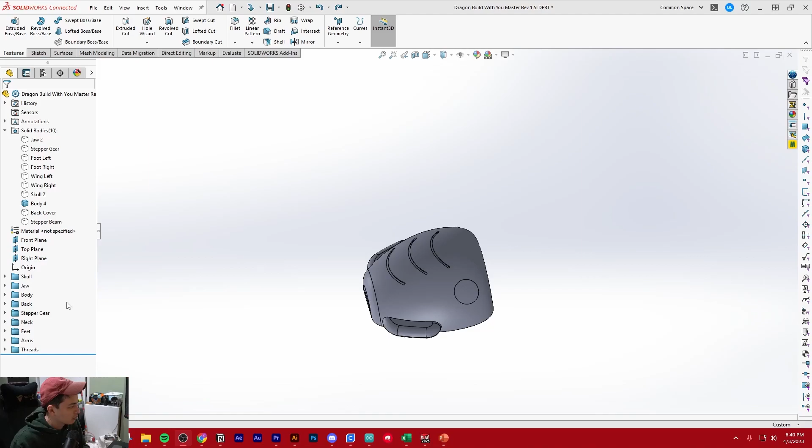Okay. So one thing I want to explain to you guys is how to make a part smooth and sort of what goes into it. So imagine you have your body piece that we want to make sure the stomach is really, really smooth and round. So imagine you're sanding this thing, right?

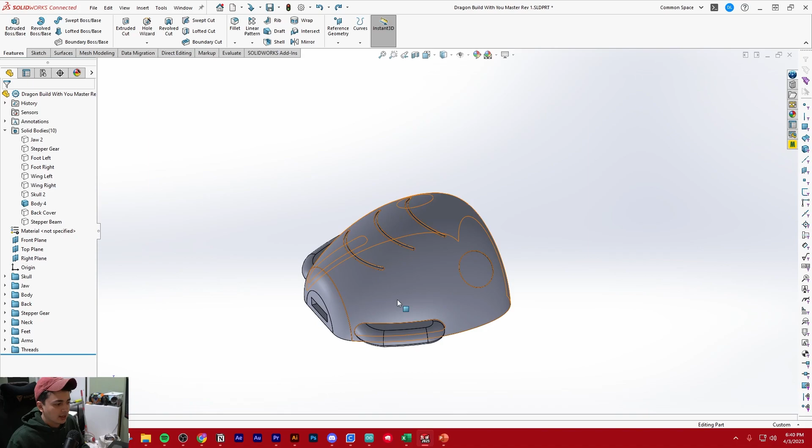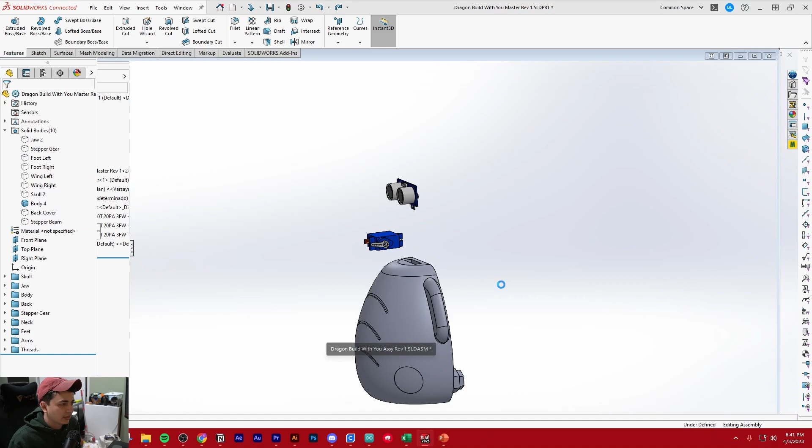So imagine you have a shape like this for the stomach. Just think about this as a cross section of the stomach, right? So when this thing is printing, it's gonna have a bunch of layer lines, right? So I think specifically, I think that we are gonna print it like this because the threads have to be printed vertically.

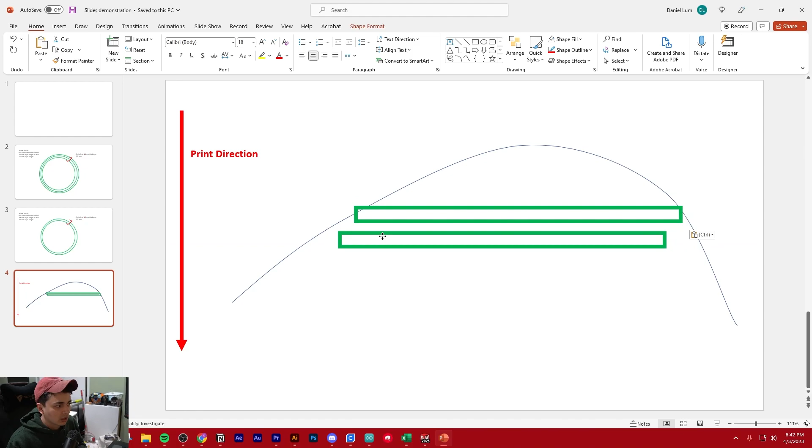So if you think about, okay, so imagine we're probably printing down, like the top would be the build plate, and we're printing down, right? So the way that your lines are going to look are sort of stacked like this. So imagine each of these green boxes is a layer line.

So what's going to happen is while you're sanding this thing, you're going to see all the layer lines, because this isn't a smooth curve, right? You see this portion, you see this portion, you see this portion, you see everything that isn't consistently a smooth curve.

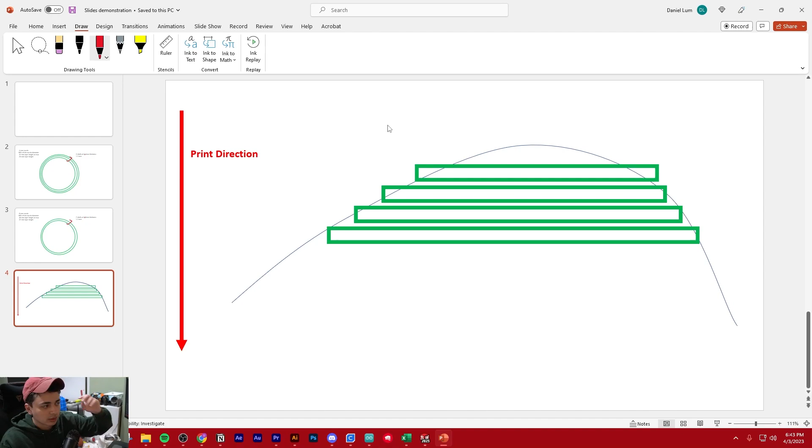So what you're going to be doing while you're sanding is basically leveling everything out along the same contour or smooth curve that I've drawn, right? So the filler is really good for filling in large layer gaps. So your filler can fill up all of this and all of this and all of this so that you can get to a smooth curve. So your filler is really good for filling in the very, very large gaps, right?

And then let's say once you've filled in all the large gaps, it's still not perfect. Let's say you miss a little bit, and instead of going all the way to the left, you get to there, right? So now let me pick a different color. Let's pretend black is your filler primer. So your filler primer is for all your minor imperfections. The reason why you use filler primer is to fill up all those small gaps and bring it all to one contour that you can sand down.

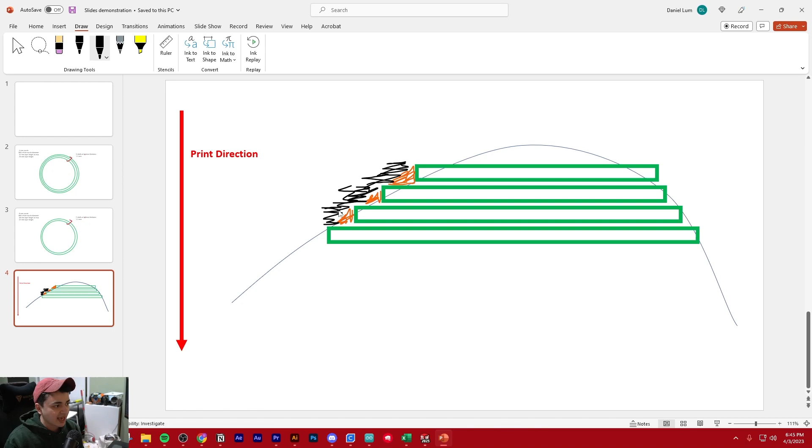So when you're laying on filler primer, you can overuse it. You can use a high amount. So let's say I did a really thick layer of filler primer and filled it all the way to here and here and here, making sure that the gaps are completely filled. Well, now all we have to do is go back and sand it. And because all those gaps are completely filled, we just have to bring it all down to one contour, so it's nice and smooth.

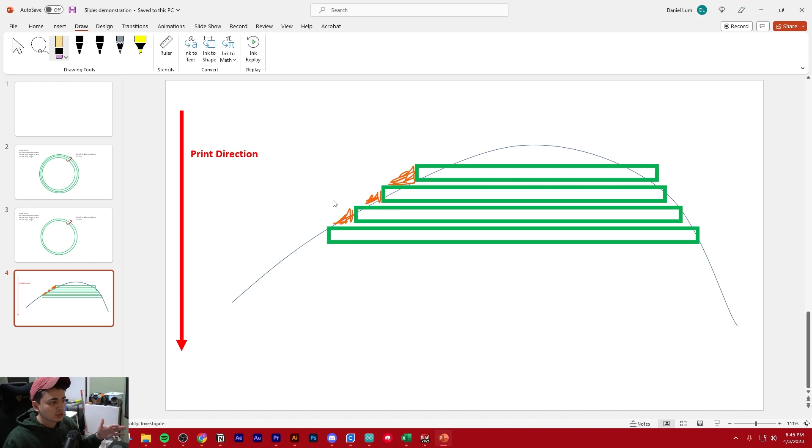So sometimes it's good to be aggressive with how much filler primer you're using so that you overfill all of those gaps and make sure everything is completely filled, and then you sand it all down. So it's okay to use a lot of filler primer, let it dry before sanding, because you want to really fill those gaps. And who cares if the filler primer starts to run because you've used too much. It's a good idea to fill all of those gaps, and then we bring it down by sanding and try to get it all to one smooth contour. That's the goal.